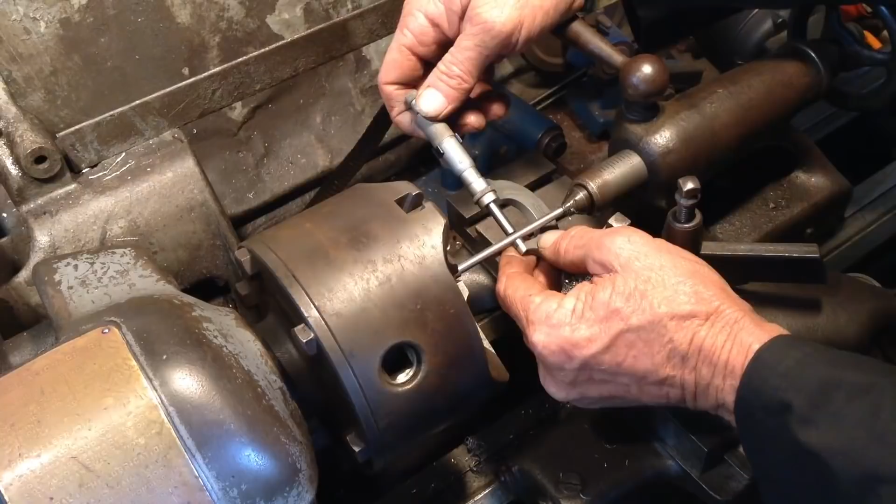So anyway, we lost the first part of this video. Basically what's happened, it's the carburettor of my little John Deere ride-on mower, and the butterfly shaft through the middle of the carburettor has snapped in half, and this is how I go about doing the repair on it. So have a look. A little bit of variation on here. I'm just going to run a spring cut across it and then we'll get a better measurement.

216, 216, 215 and a half. That's all right. We'll leave it at that. Just a quick polish.

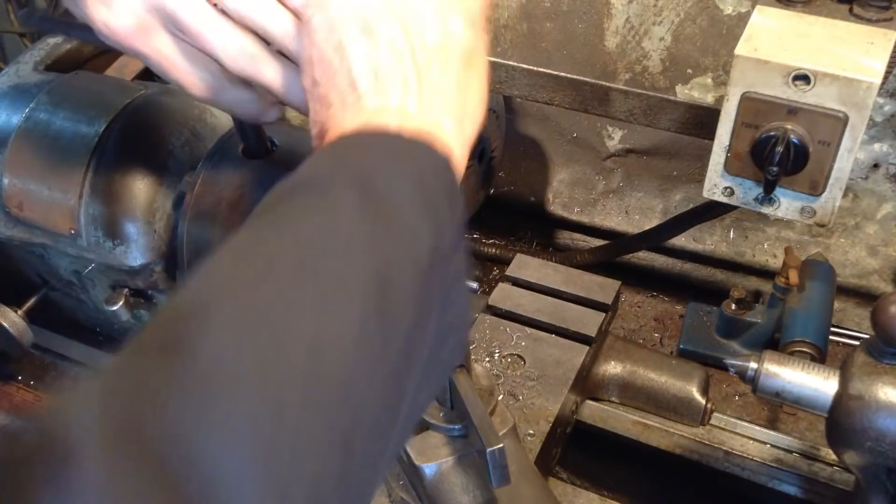Okay, we can pop this out of here now, and I'll take it over to the vise and I will hacksaw it to length. And then we can face the ends off, get it in the milling machine and machine the flat on it. Now I do have a tool post that mounts on the back of this cross slide arrangement here. That's to hold a rear mount parting tool. So you put the blade in upside down.

Interesting enough, this cross slide was made by my dad when he worked at the Post and Telegraph workshops, and it was actually made on an old Wotan shaper machine, which was one of the machines that was reclaimed out of Germany after World War II finished. So bit of history on this lathe.

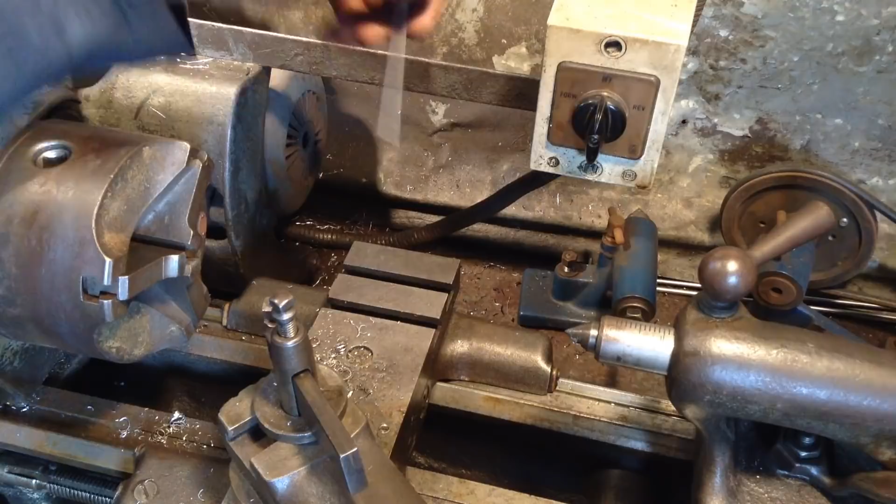Plus, my dad owned this lathe from brand new, and he used to make wheelbarrow axles in the back of my grandfather's shed many years ago, before I was on this earth. And his business progressed from making wheelbarrow axles on this lathe to a very large structural engineering shop with a machine shop out the back. And of course that used to be my playground. So I started very young and early.

That should do it. Quite a bit of wear in the cross slide on this lathe too. Something I'll have to address. Once we do get over to the new shop, I'm going to strip this lathe down and go right through it and give it a complete 100% restoration, as this one I will never ever sell. It's too much family history behind this machine to part with, so we'll get it back to brand new condition.

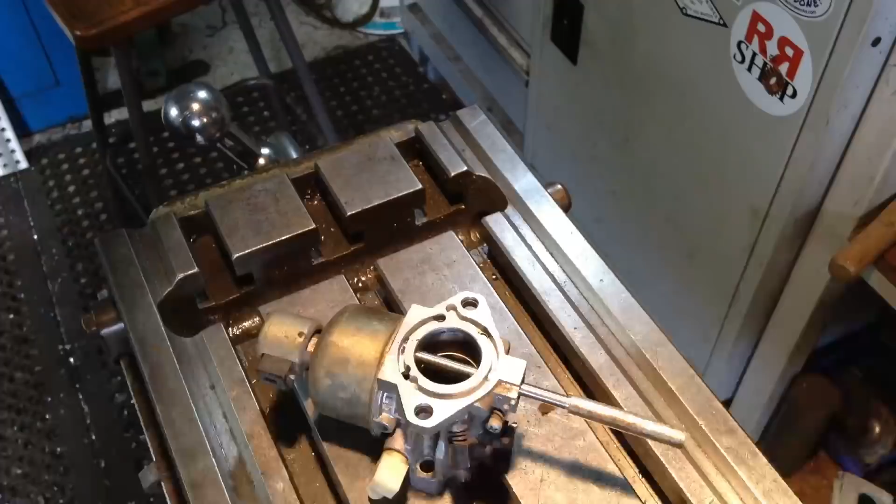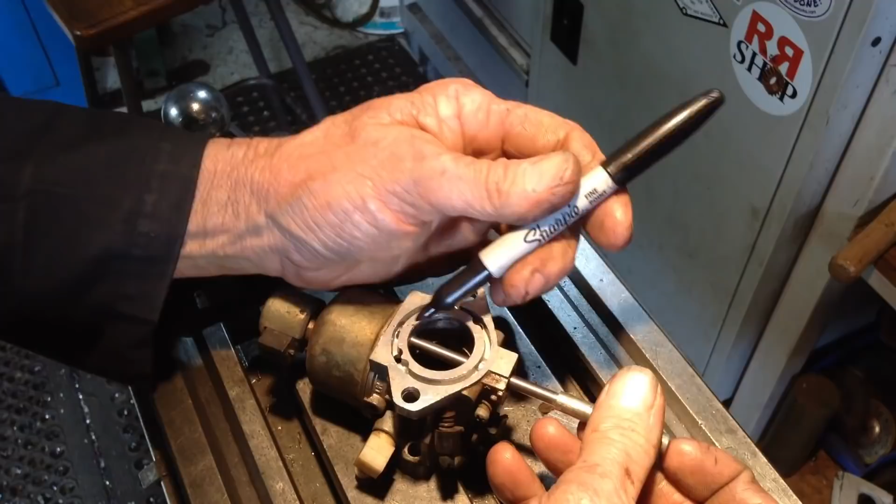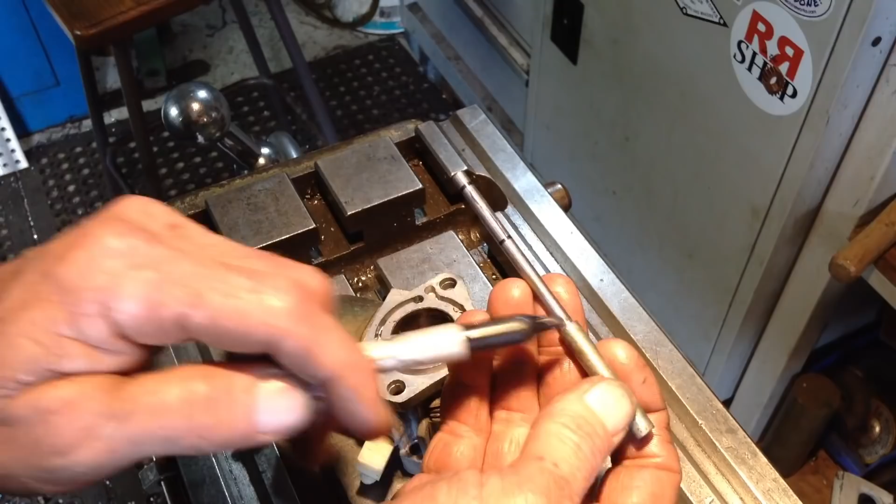Okay, so I'm just going to use a Sharpie marker and get a location where we have to machine our flats. Okay, so if I machine to the outer extremities of the Sharpie marker, we'll be in the correct location. Now, I didn't actually cut it to length yet. I just want to be 100% certain on how I'm going to hold this in the milling machine before I lop it off. Let's see what our options are.

Okay, leaving the shaft long paid off, as I had to hang it out the vise far enough to support the underside of it with some 1-2-3 blocks. So that worked out well. So what we're going to do is machine down half the thickness of the shaft, so half the diameter, plus half of the width of the butterfly. That'll keep the butterfly rotating on the axis of the centre line on the shaft. So that's a total of 3.12 millimetres. So we'll touch off and mill away.

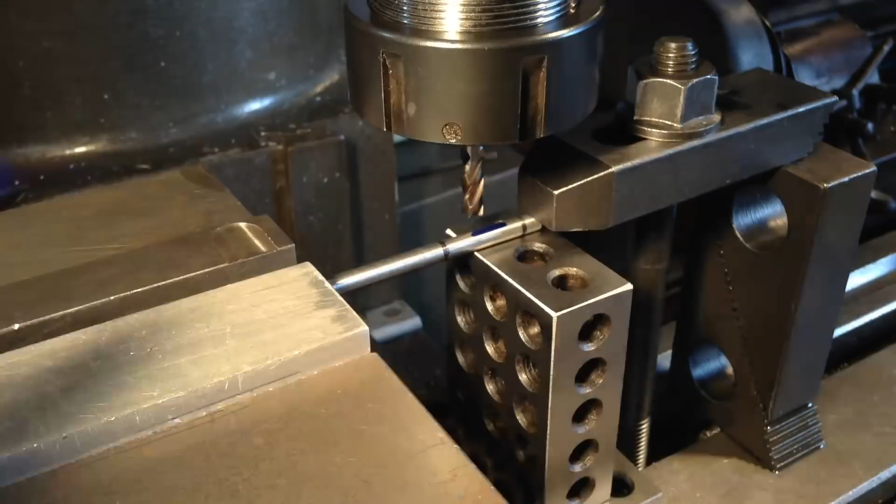Okay, we'll just mark the top with the Sharpie so we can see when we touch off, and we're coming up a total of 3.12 millimetres. Write that down.

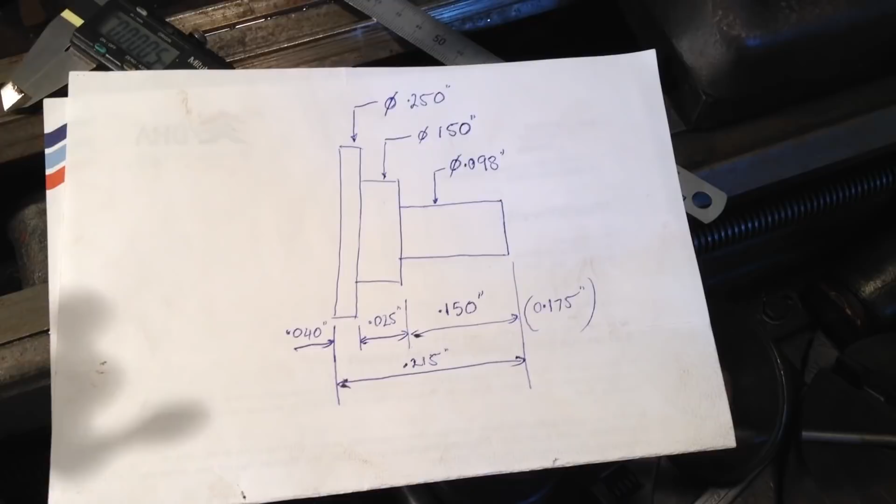So we've knocked up this little sketch. This will be the 2 rivets required to hold the butterfly to the shaft. So it's just 2 little tiny tot things we've got to make. Roughly a 1/4 inch diameter on the largest part of the head of the rivet, and 215 thou long overall. So this will be our setup.

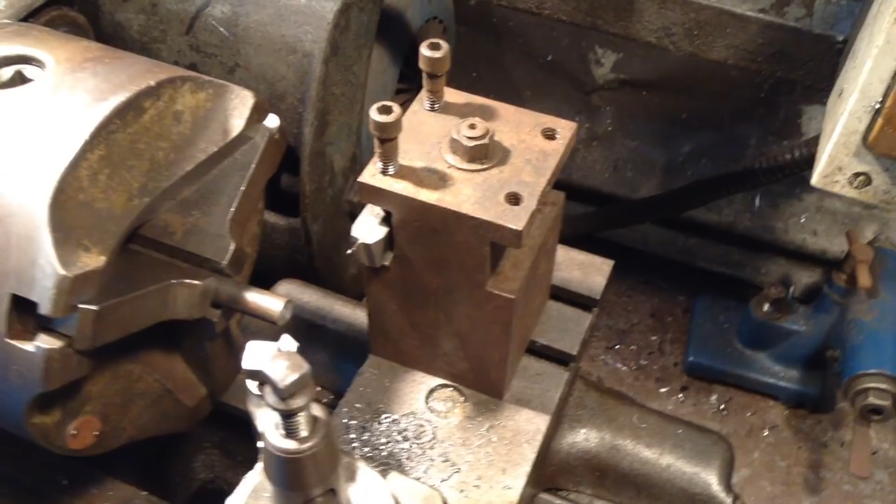And to the uninitiated, this lovely chunk of cast iron that's been made on the ex-World War II Wotan shaper from Germany is a rear mount tool post. So we have a tool in there at the moment, and we will use this tool to do our parting off operations. Now this is the best way to set up a parting tool in one of these small lathes. Really it's the only way to do it. So let's get turning.

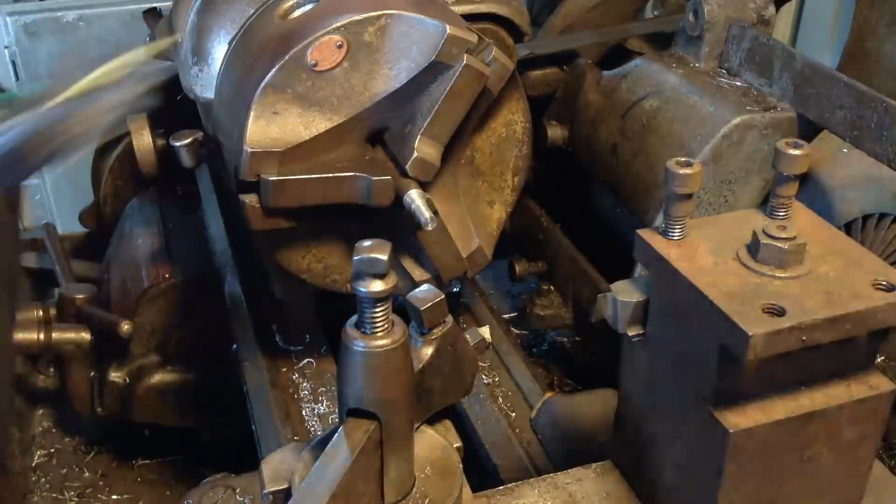So we have a piece of 10mm black round bar, so we'll turn the entire length of it down to the OD, the largest OD of the rivet, which is 250 thou. Switch on, engage our feed. And we should get a size. 317, so way to go yet. 250.5 thou. Okay, that's our first diameter.

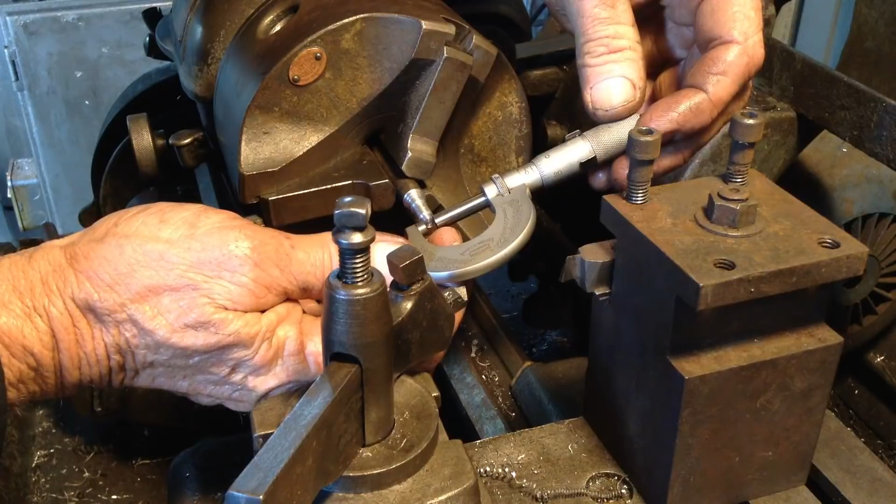Sorry, 27 thou to go. It should be 150. Yep, a thou up on size, that's fine. As long as our washer, butterfly washer, fits over that. Lovely, that's what we want.

Now we'll just double check our length. 175 thou we're supposed to be. We're 156. 171, 4 thou to go. Okay, our last step is 150 thou long for a diameter of 98 thou.

Okay, that will do that. So that'll locate the larger hole of the rivet like so, and be below flush on the end of the rivet. And the small diameter should fit through the hole in our shaft. Which it does. Okay, that leaves us a little bit on the end to peen over. That's the first one done.

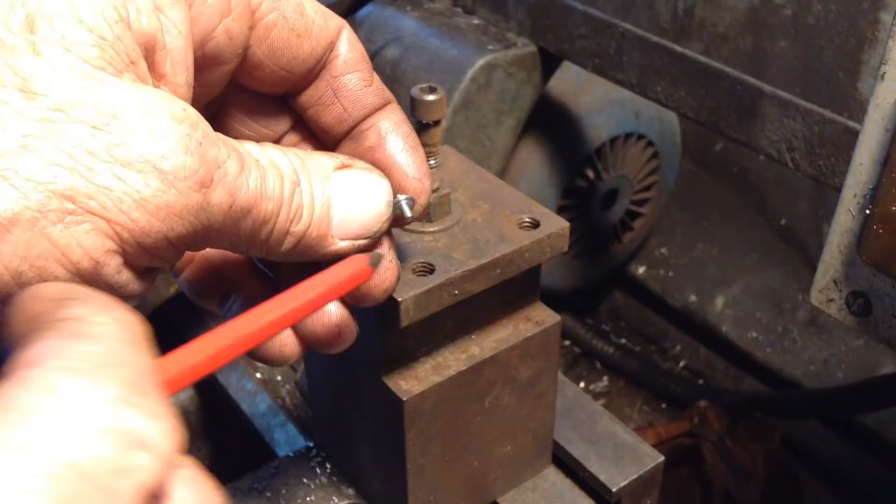Okay. Now we just have to search for our part. Well, that took some finding. Okay, here's our small stepped rivet. So it has this very small shoulder under the head, and that's to locate the butterfly.

Now on the parting tool itself, that went well, but the front cutting edge needs to be ground to be angled the other way so we don't get this tit on the end we have to now deal with. So I'll go ahead and make one more of these off camera, and then we'll go through the riveting process. And the last one, we didn't lose that one.

Okay, so I'll file the tit off this one. Whoops, just lost it then, I think. Okay, I'll go searching. We'll file the tit off that one, and then we'll get this thing assembled. Well, we've got to have a look at the thing on the other end. I'll show you.

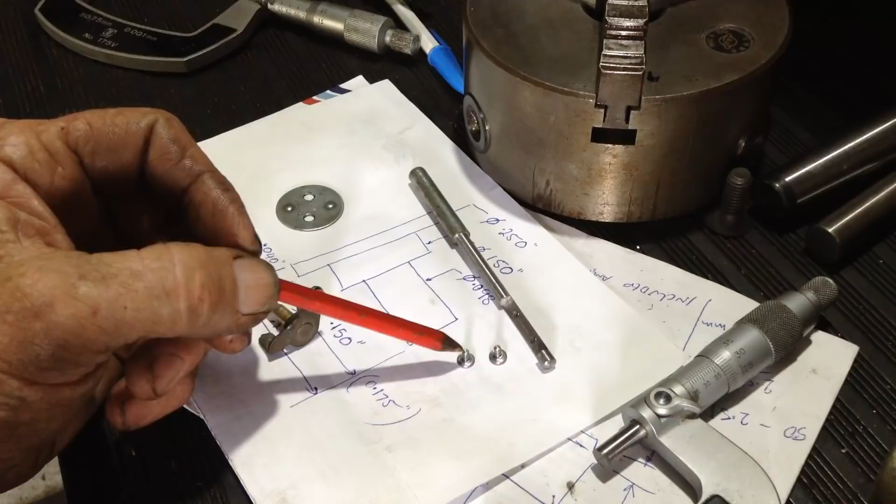Okay, there's our two little stepped rivets as per our sketch. So both we lost and both we found again, so we had a win there. And you've got to love a rear mount tool post for parting off. Albeit they're only parting off very small items, it's really the only way to go with a small lathe of that description. A lot of people piss and moan about parting off, and then they just go straight to the saw without addressing any of the issues.

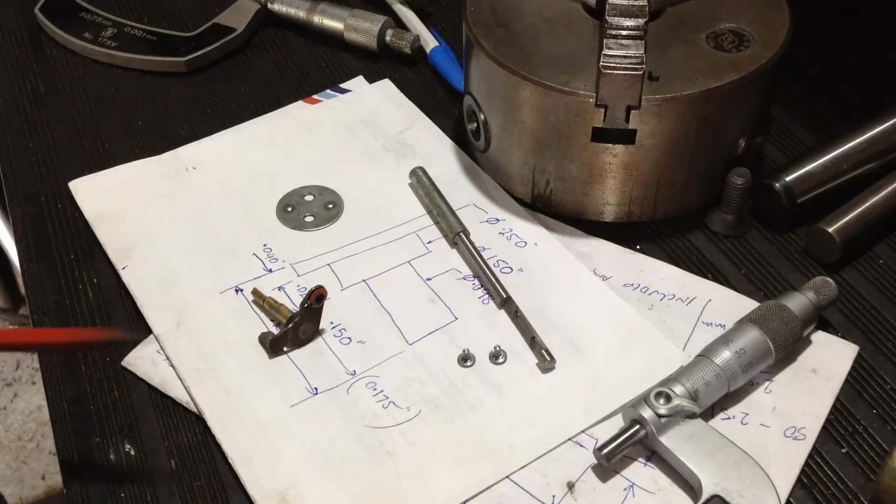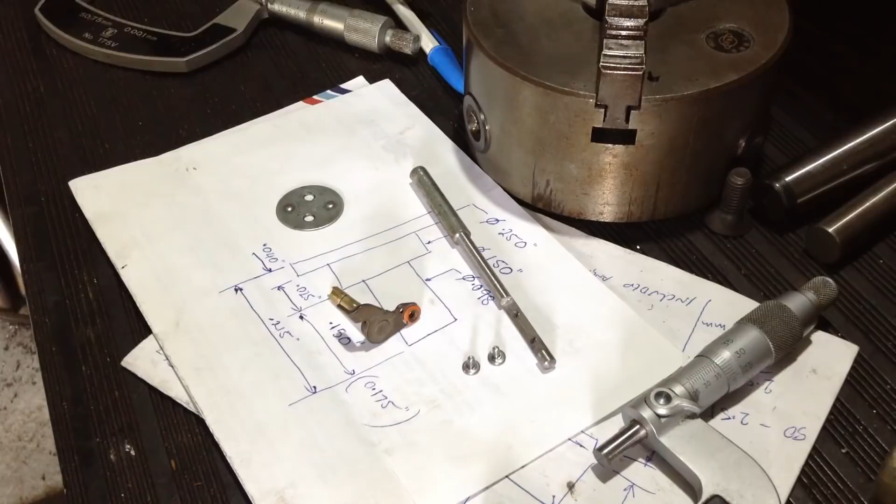I mean, I could rattle off 20 reasons why you're having issues parting off, and I've listed them on videos before, so they're there. But anyway, let's move on. There's our rivets done. We've had a win with our shaft. It just has to be cut to length, and the little lever on top, we need to remove the peened over section on the top, remove the lever, and come up with a way to attach it to our shaft. So I'll go off camera now, and I'll just go and file or grind off that peened over section, come back with a shaftless lever, and we'll come up with a plan.

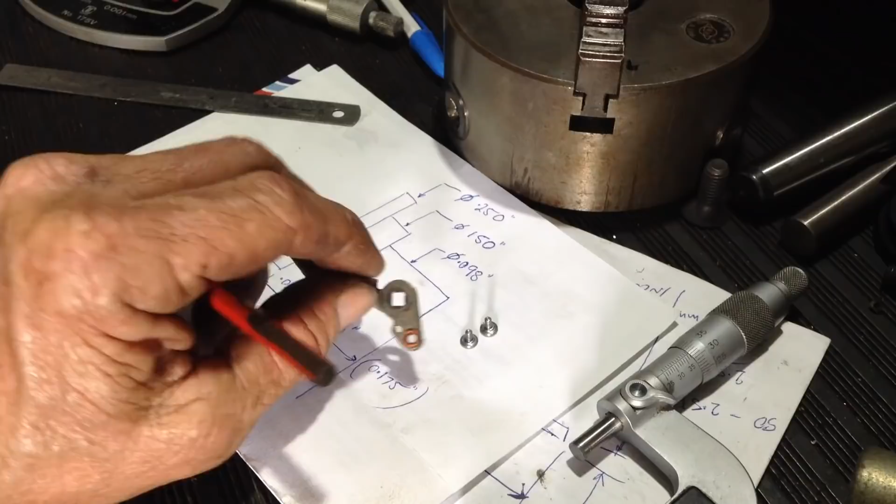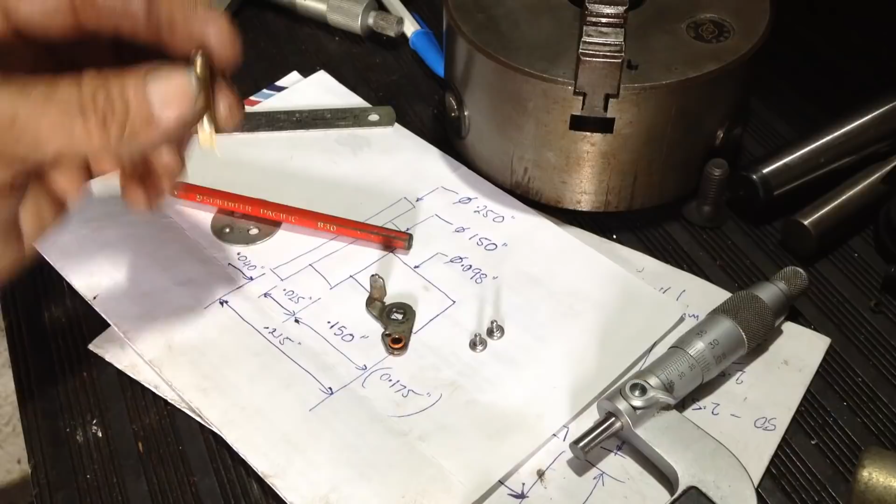Okay, there's our lever. It has a square shaped hole in it. Now where it came off the shaft, it's got a square that had been riveted over, but the square's at an oddball angle to the flat face. Yeah, she's probably 15 degrees, 20 degrees out of reference to the flat face there. So I think what I'm going to do on our shaft, and I've lost it again, here it is, I'll put it back in the lathe, we'll part it off to length,

and then we'll machine a little shoulder down on the top of it that our lever can sit over. We'll assemble up our carby, we'll sit our lever on, and then we'll just get the MIG welder and we'll just put a tiny spot on it, and that will hold it. So we'll get back to the lathe and part this to length. That's all we need. Little spot of weld on there, she'll be apples.

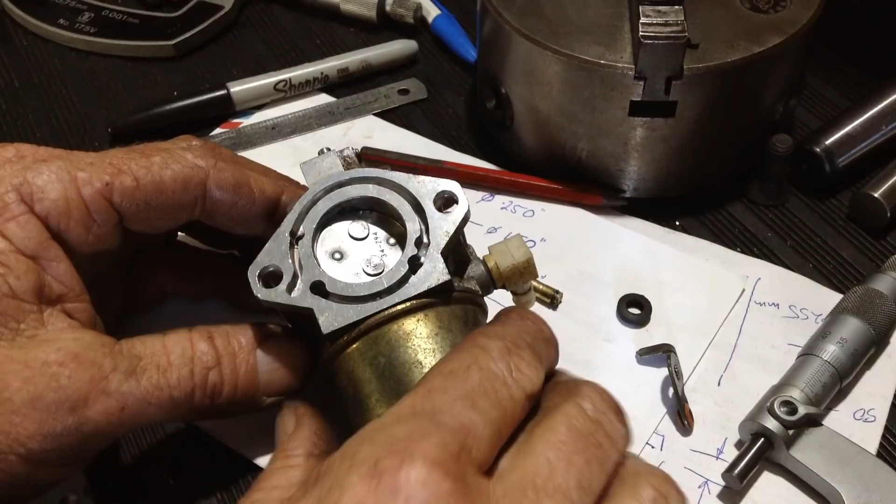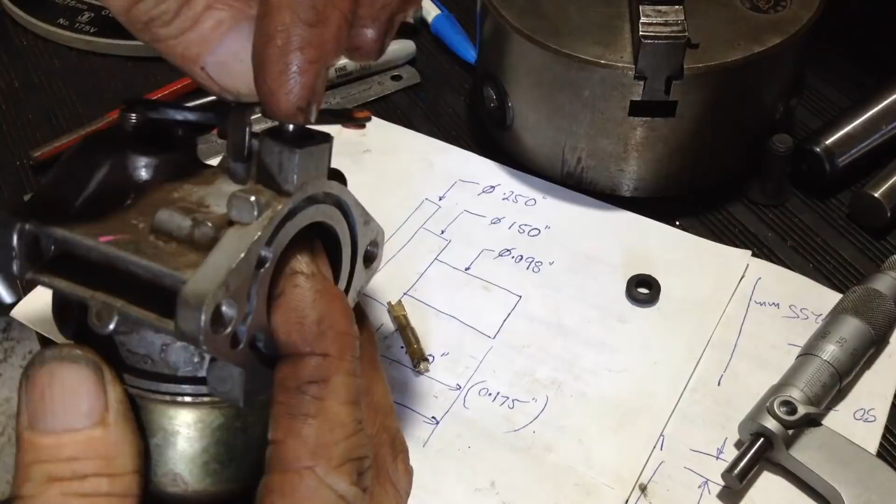Okay, there's our rivets and shaft in place. So we just have to come up with a plan to pin over the rivets on the rear of the shaft. So I think I'll just grip a little bit of shaft in the vise, so I can set that on it. Then I can come through with a pin punch through inside and just give the back of each rivet a bit of a tock with a hammer. Once that's done, then we can set our lever arm in position. We'll know then it will be in the right position. And yeah, just put a little spot of weld on the top of it.

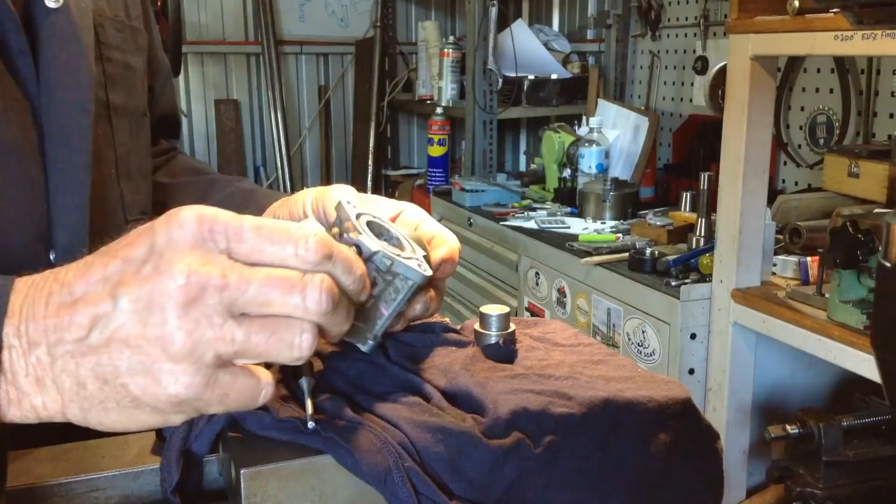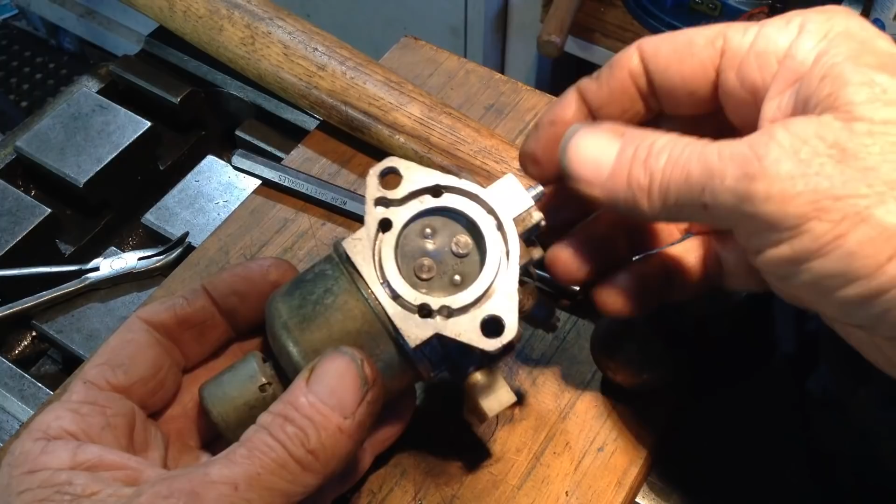Okay, we had a win. Beautiful. Let's show you in a close-up. Of course, we had a rag down in case any of the rivets fell out, so they fall on the rag and not anywhere in the surrounding area. Okay, so you see there now we have the larger head of the rivet, and we open up the butterfly, and the other side of the rivets we've managed to pin over, so we managed to reach them through the rear of the carby with a pin punch going down and hammering onto a slug held in the vise.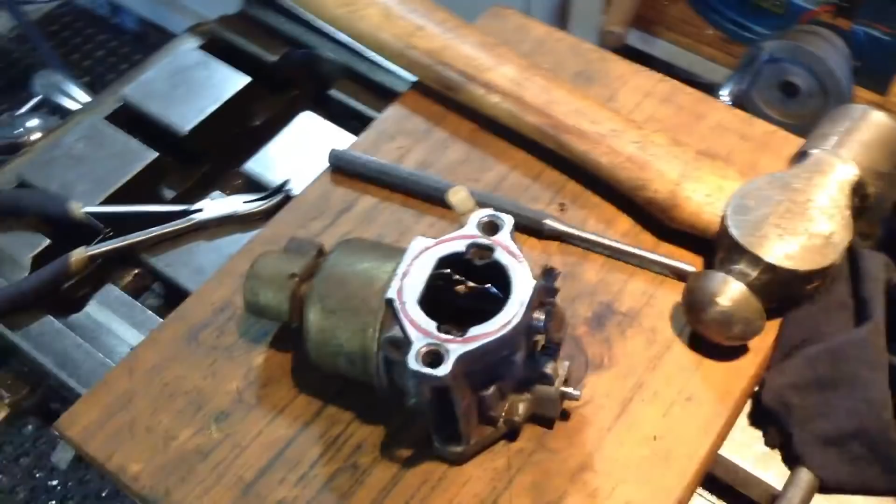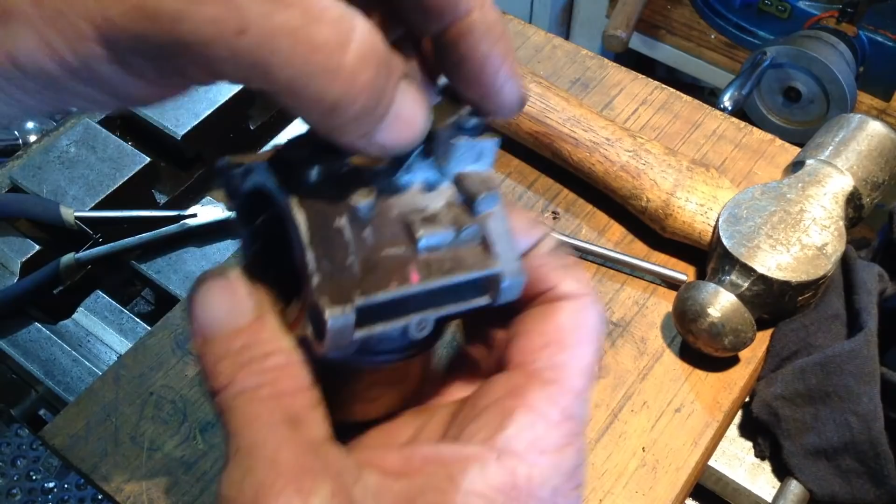So okay, all we've got to do now, there's a rubber seal that goes on the top there, which is that, and our little link arm sits on top there, so we make sure the butterfly is fully closed, the idle position's backed right off where the arm contacts the idle screw, just there. So in that position there, and that's the position we put a little spot of weld on the top. So let's head over to the welder.

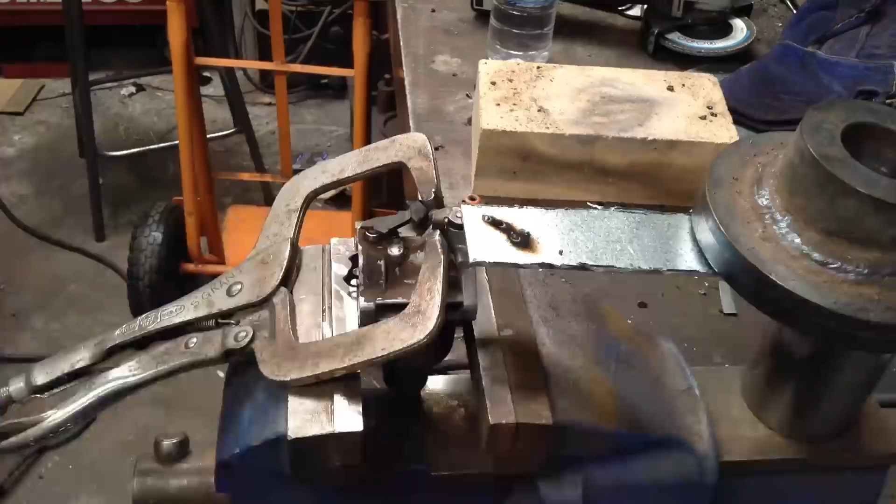Okay, everything seems to be in position. So we've got a piece of material here which we have our earth clamped on up the other end. That's holding everything together, holding the weight down on the butterfly shaft and making the contact for the earth. And a clamp here holding the lever in the correct position up against the idle adjuster, which is backed right off. So if I just put a little spot of weld here,

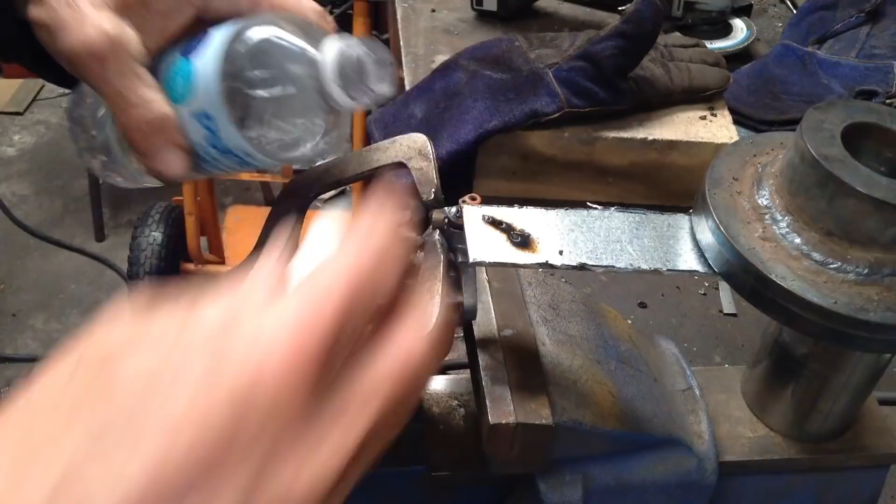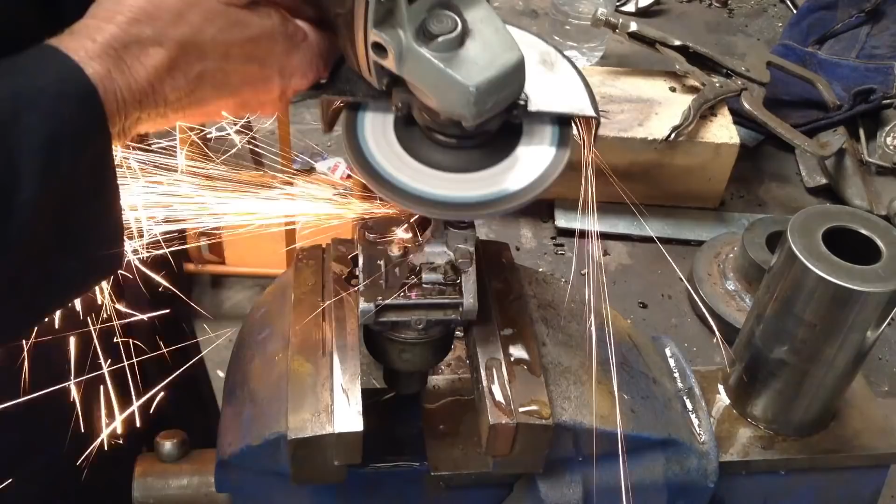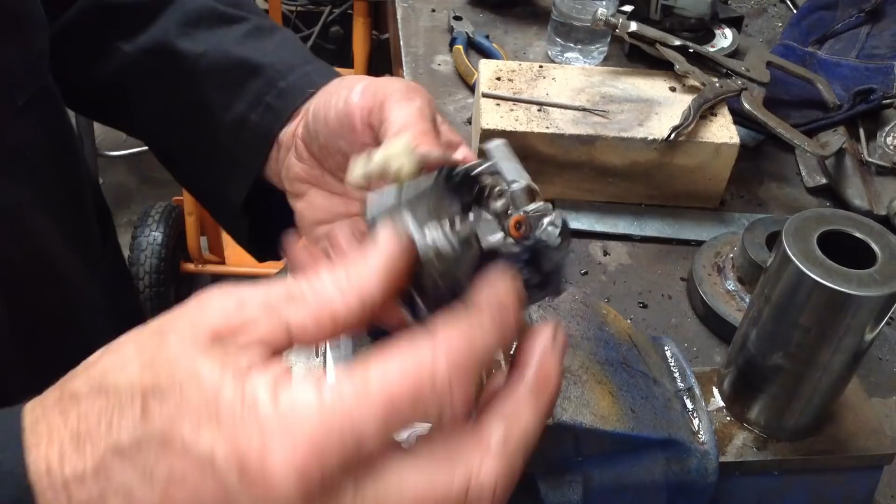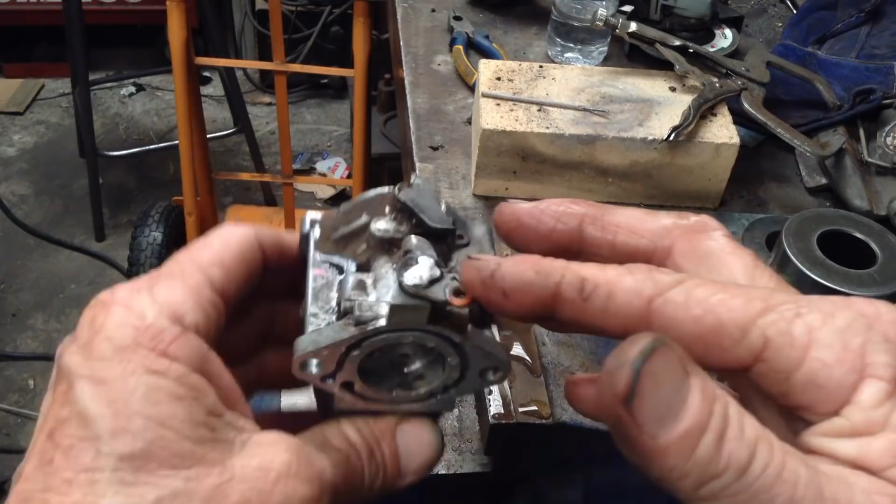and what I want to do is quickly cool that off, because there's a rubber seal underneath it. We want to keep that cold. Have to flush this water out. Okay. Job done. So I'll flush the carburettor out, get that water out of it. We'll mount it back on the mower, and we should be good.